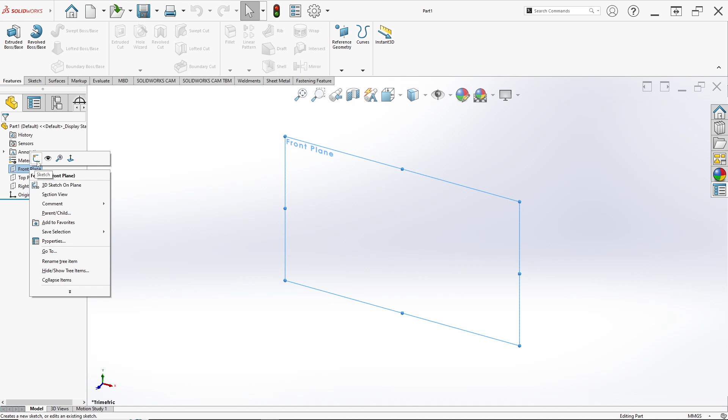Just start it, go to SolidWorks. First, you want to begin from front plane. Right click on front plane and click sketch. Here I use a millimeter unit. We can change that in the bottom, in here, millimeter unit.

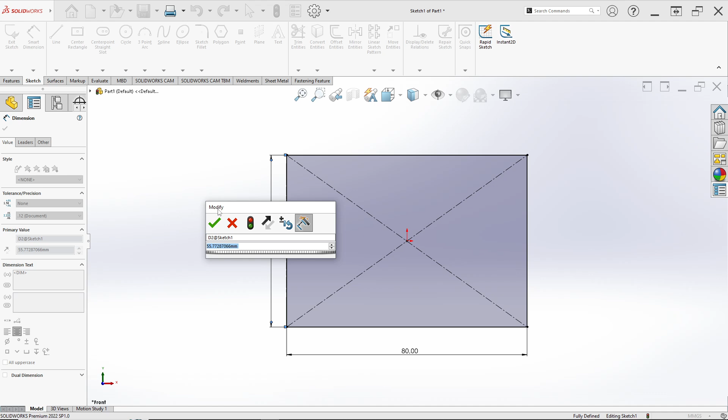We want to make first a center rectangle. Draw it from the origin point. The line is 80 millimeter, 80 millimeter, and the width is 50 millimeter. Just input, set the dimension like this.

Make a center line like this to this line. Draw circle from this point like this. Have the cut of the hole like this, the half hole. The half of hole is a circle, have radius 25, so the diameter is 50 millimeter, like this, because the radius is 25.

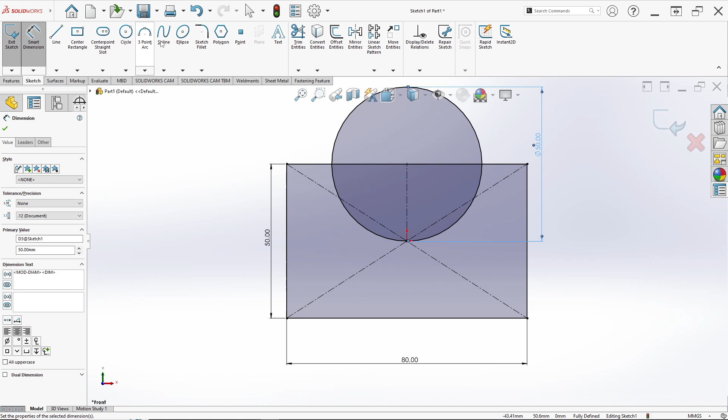Then we can do trim entities, this line and this line. Okay, it's so simple. Go to feature and export to solid part to extrude boss like this. We can see in here the total, this point to this point or this line is 58. So direction is blind, in here is 58 millimeter.

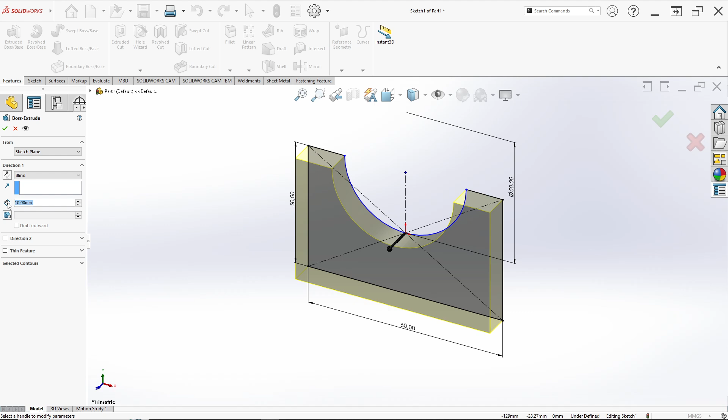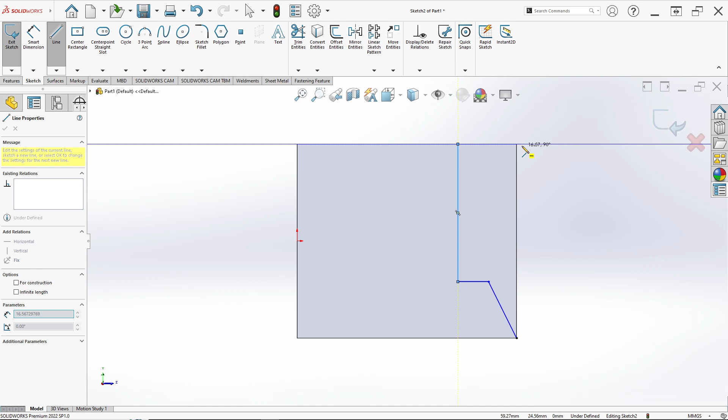Just click OK. And you want to make a cut in here like this. So this face, right click and click sketch. Click line, draw line like this, and this, and this like this. Okay, then set the dimension.

We can see in here the total of this point is 58, but in here there's a slope, cut a slope. So this line has 40 millimeter and plus 10 millimeter, the total is 50. So this point to this point, 58 minus 50, so in here is 8 millimeter.

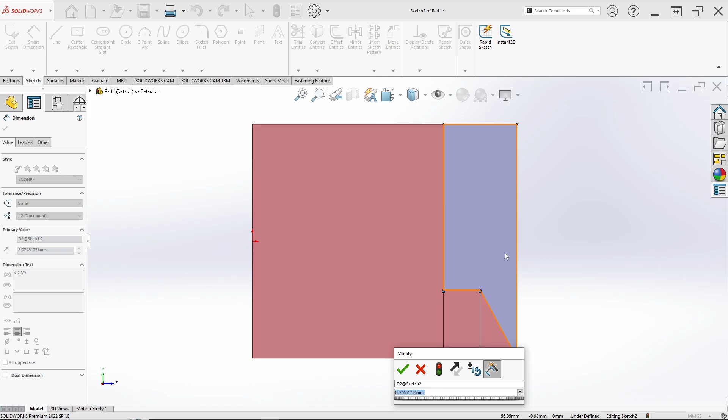Then in here you can see it's 10 millimeter. This line has a height of 30 millimeter like this.

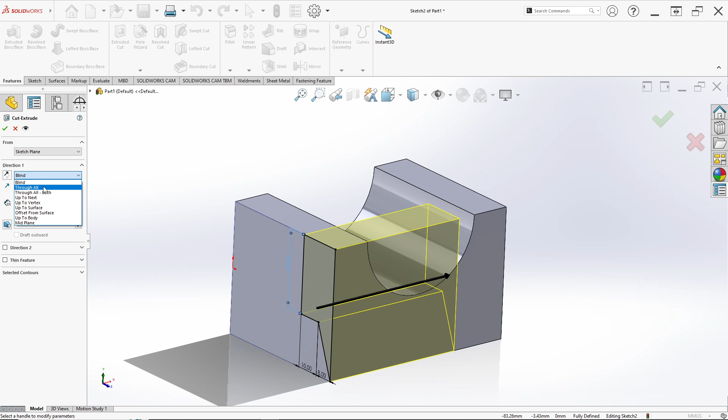After that, we just cut the sketch using extrude cut. Direction change into through all. Just click OK, and then it's so simple. Don't forget you want to make a cut like this.

So this face, right click, click sketch, edit sketch. Then in here we want to select corner rectangle, draw like this.

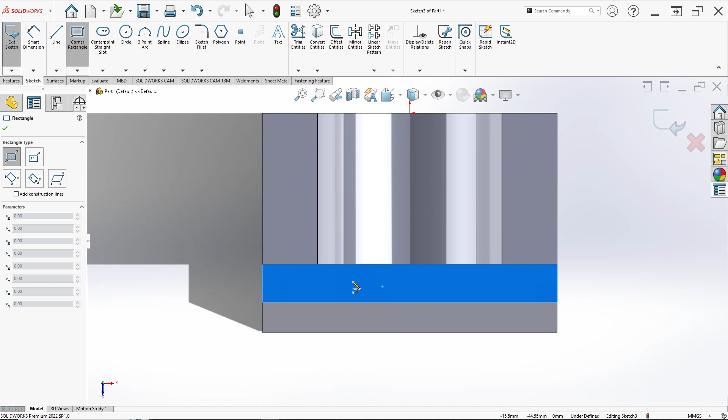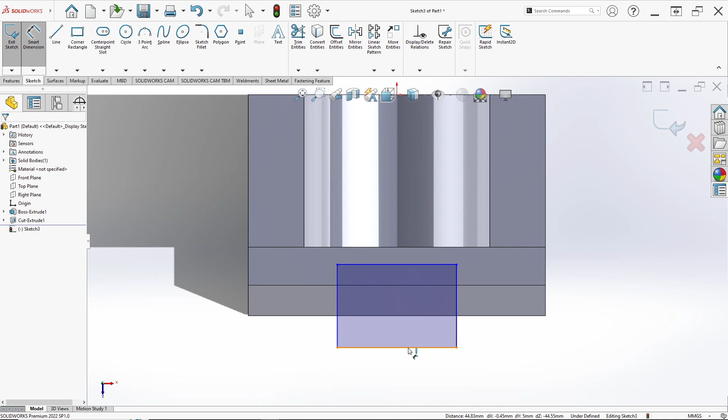Ensure we draw long, add from this edge, we want to make it longer. Then ensure the center of the rectangle and the center of this part in this point make vertical like this. Then adjust the length in here is 40 millimeter. Then this edge and this edge, this line and this edge, this line and this edge is 5 millimeter.

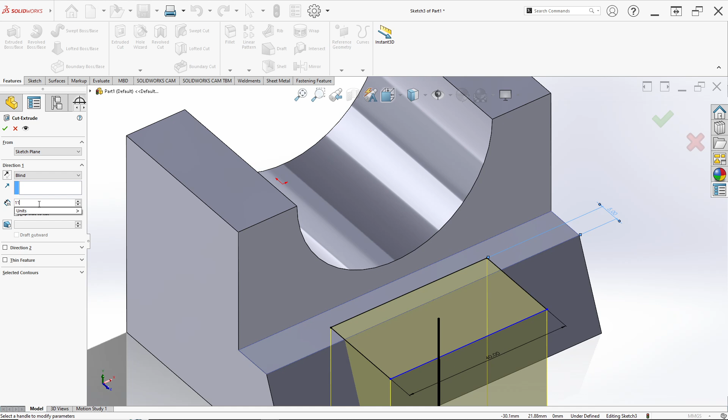Then go to feature and just extrude cut. The depth we can see in here is 11. Direction we can change to blind. The depth is 11 millimeter like this.

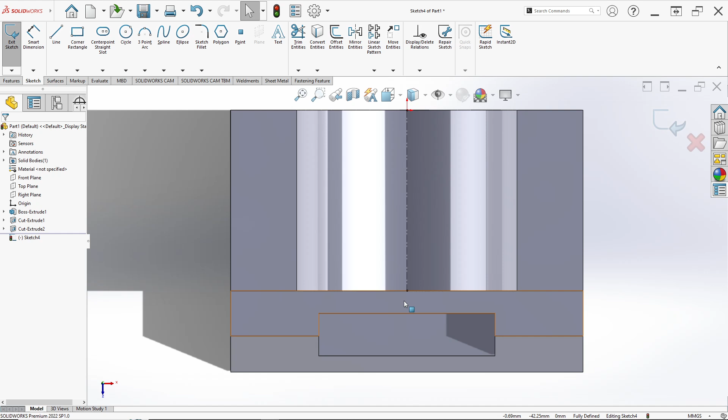Then in the end we can do a cut again in here. So this face, right click and click sketch. Make a center line, draw from this point to this, and select the center rectangle.

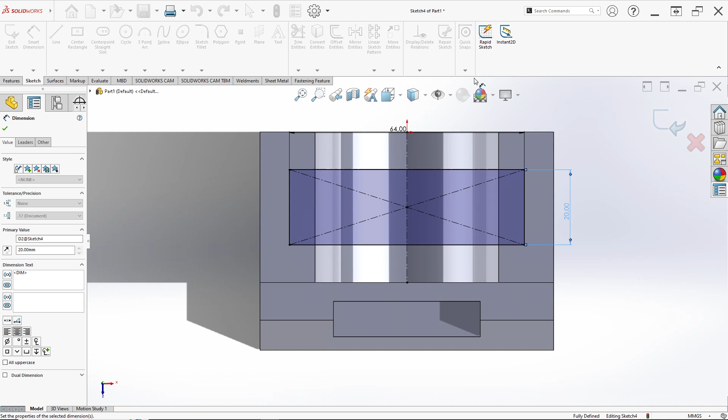Ensure we begin the center line like this, we draw it like this. Set the length to 64, just input 64 in here, and the width is 20 millimeter, like this. So we can check in here this edge and this line is 10, and then this edge and this line is 10 millimeter too, because we start from this point, the center of the part, like this, center of the center line.

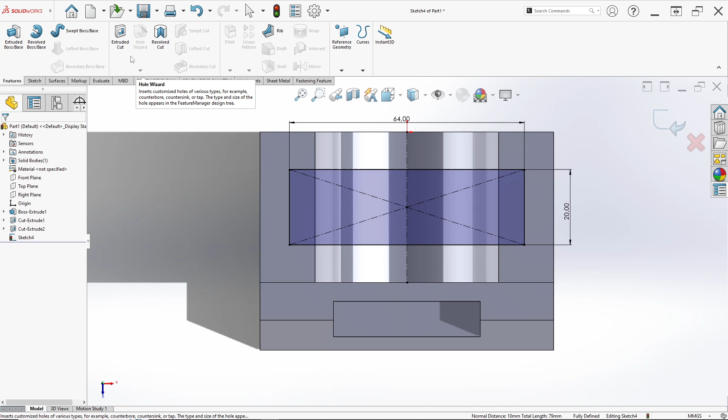Okay, after that we just extrude cut, the depth is 15 millimeter. Go to feature and extrude cut. Direction is blind, but in here we can change the depth to 15 millimeter. Just click OK and done.

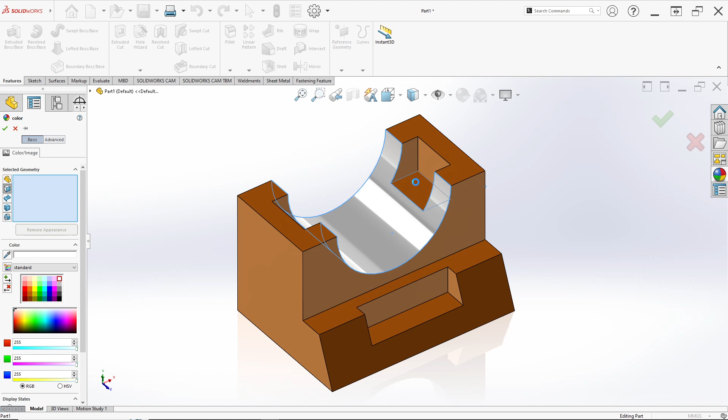We can select all the feature, change the color, maybe in brown like this. Then we can change again for the color of the cutting like this. We can change like this and this, and done. We just make a simple part like this.

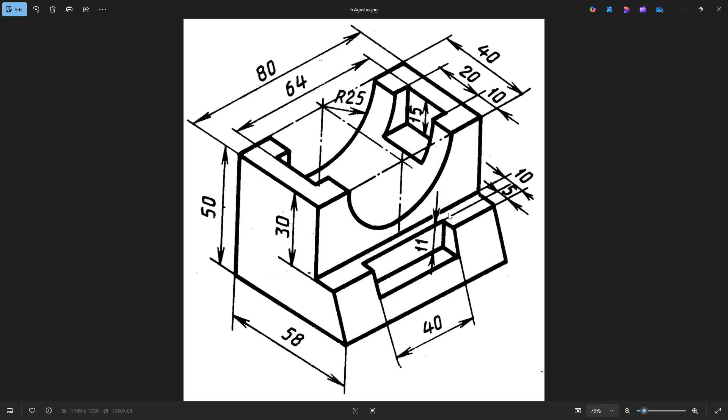It's a simple part for beginners, really beginner, it's perfect for beginner, to start to make you more confident in SolidWorks. I hope this tutorial helps you in learning SolidWorks, especially for beginners. I apologize if there are any mistakes or errors in this material.